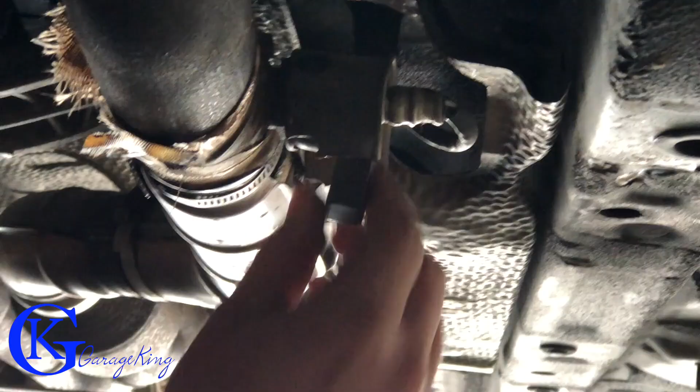This is an OBD2 scanner. It reads 4 systems: ECM, ABS, SRS, and TCM. So pretty much your whole powertrain along with your supplemental restraint system, also known as the airbag. It also has 9 service functions.

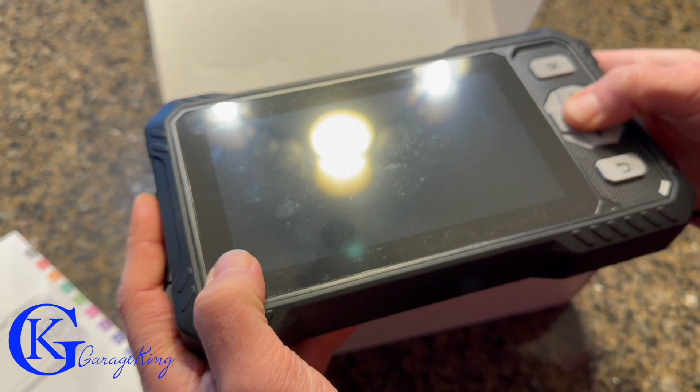When I was taking it out of the box, I noticed it seems like very good quality. The buttons are really good, and it's pretty simple, which is what I like. There's a nice power button, and if we flip it to check out the front buttons, they have a nice tactile feel and seem well built. The only other things in the box, aside from the manual, are your OBD2 cord, which you obviously need, and a cord to charge the instrument. Pretty simple, nothing to it.

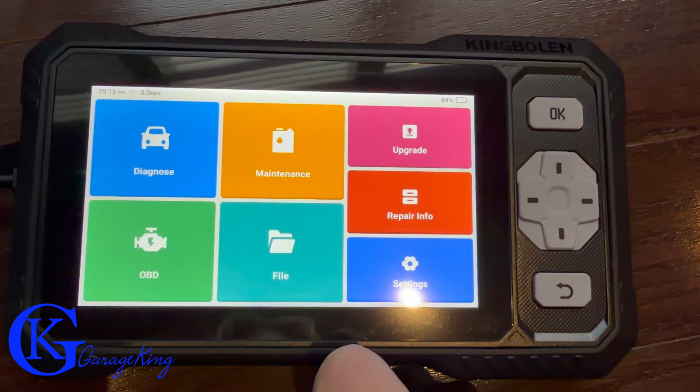Anyway, let's power it up right now. I've sped up the video just a little bit to power it up, and the one thing I wanted to mention was how easy it was to actually set it up. Here's the welcome screen. Once you click the welcome screen, you can see the machine is already good to go - you can plug it into a car. You don't even need the internet.

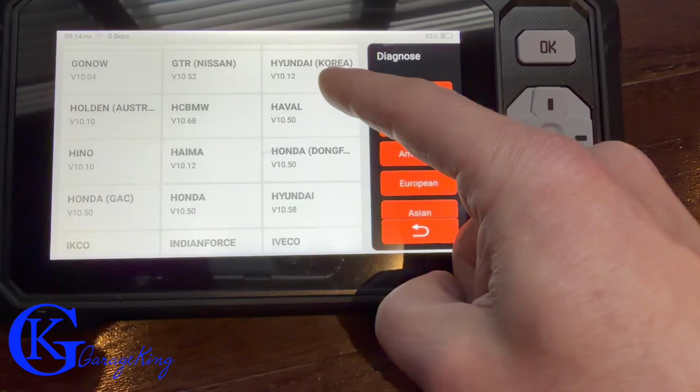The S608 claims to scan up to 100 vehicles, and no doubt it probably does, as I'm scrolling through them right here. You can pause the video if you want. I haven't counted all the boxes, but I'd say there's probably around 100 here. One of the nice things is I didn't have to enter an email or even connect it to the internet for it to start working. However, if you want the latest updates, you'll have to connect it to the internet and use the auto update.

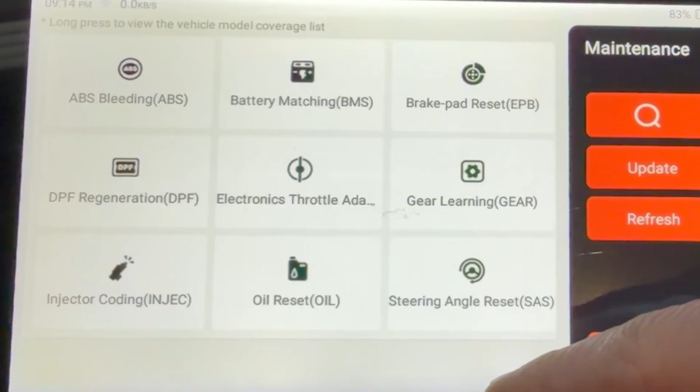Here we're in the maintenance functions, and we can see we have ABS, battery matching, brake pad, DPF regen, electronic throttle, gear learning, injector coding, oil reset, and steering angle reset.

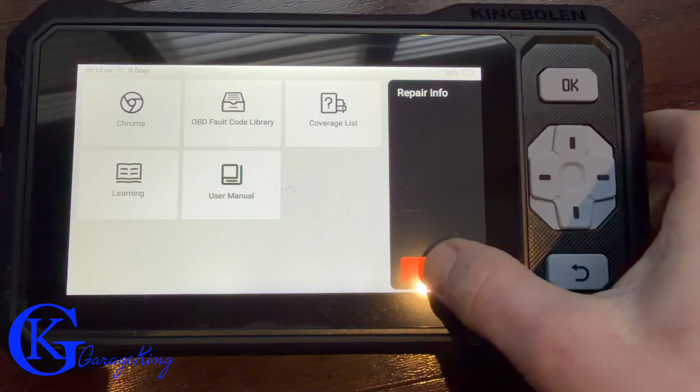Under the repair info tab, you can see we have our browser and our library - a couple things under there. If we look over here, there's our OBD2 or OBD. It's not going to work because we're not plugged into the car. We can go into files over here, and I have no file saved.

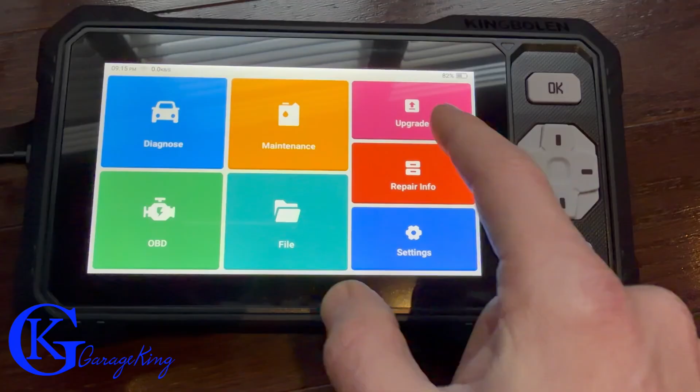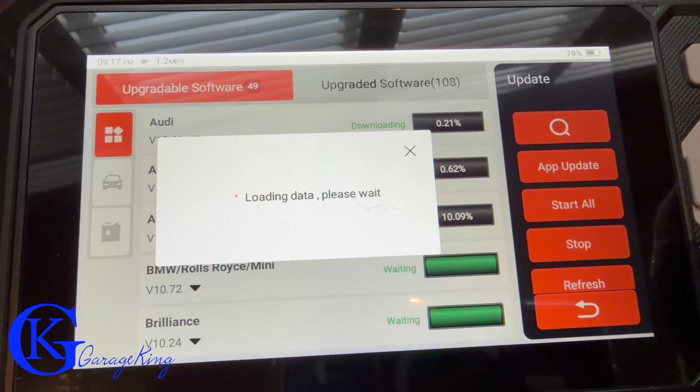Up here we can see this is our upgrade section, and I don't know if you can see in the top part of the screen, but it says 49 are upgradable. So may as well connect to Wi-Fi and upgrade them - it's free, why not? This way we have the latest software. Let's do that, and now let's try it in a vehicle.

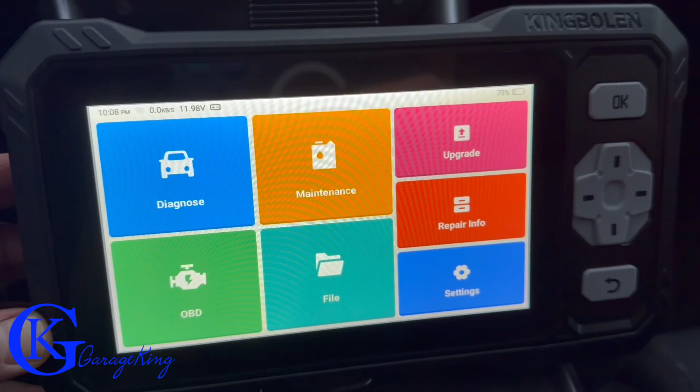So we have my Lexus - absolutely love this vehicle right here. We're going to power it right up and see what this scanner can do. Keep in mind, when we're running the scanner through the paces, that we're at the $200 mark. $200 doesn't really buy you a lot. Let's see exactly what it can do.

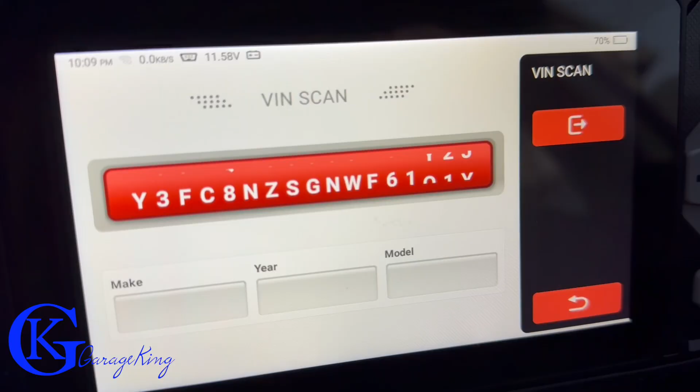I found the auto VIN scan to work very well. The other thing I found with this scanner, which I see in a lot of other scanners, is there's more than one way to get into a system. The first way is through the health report - take a look at the clock at the bottom, you can see it's done in about 10 seconds. That's very fast for a scanner in this price range, and there's all the systems it detected, and we can get into any of them.

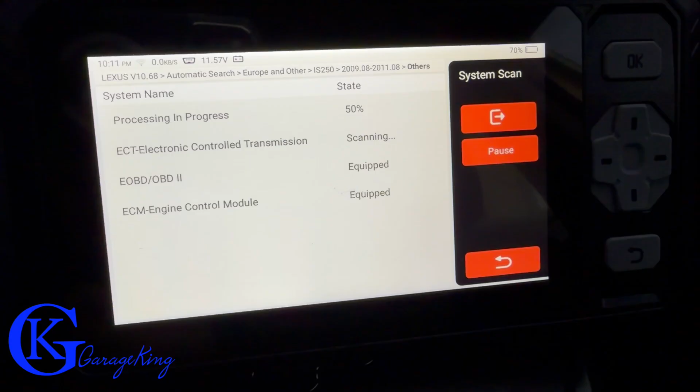The second way you can get in is under the system scan, right under the health report. It'll find all your computers, and then you can just click on whatever computer module you want. For example, I'm in the ECM, the engine control module, and it says there's no trouble codes. Here I can click back and look at our actuator tests down at the bottom.

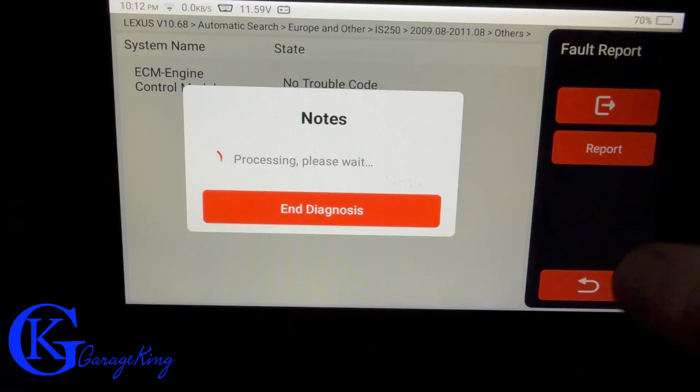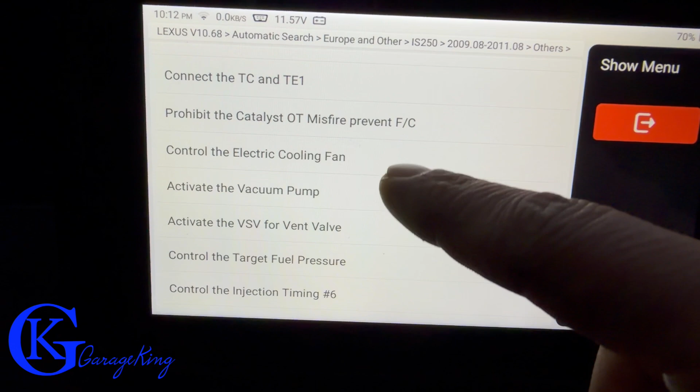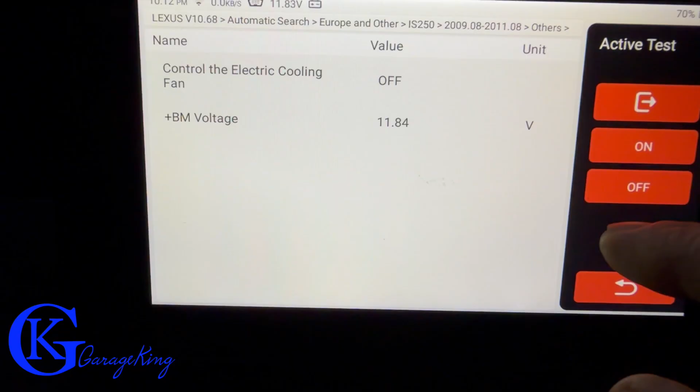I was pleasantly surprised at how many actuator tests there were with the S608. I'm scrolling through them right here, and you can see we have quite the selection. One of the things you can do is monitor data when you're doing the test - this is important if you can't hear certain things. For example, let's monitor the battery voltage when we test the cooling fan, and the battery voltage should go down slightly.

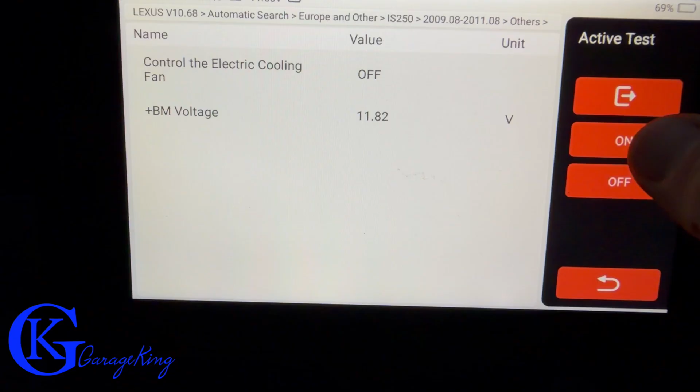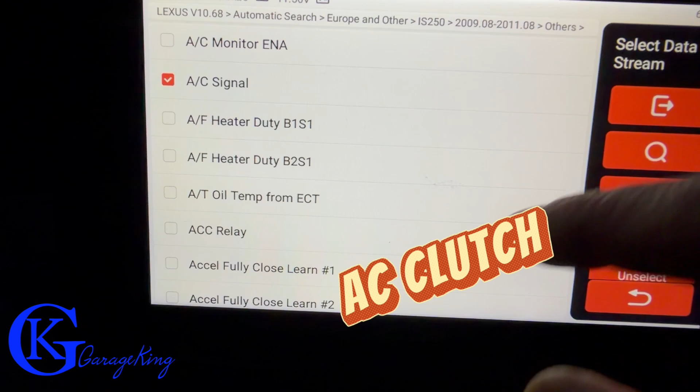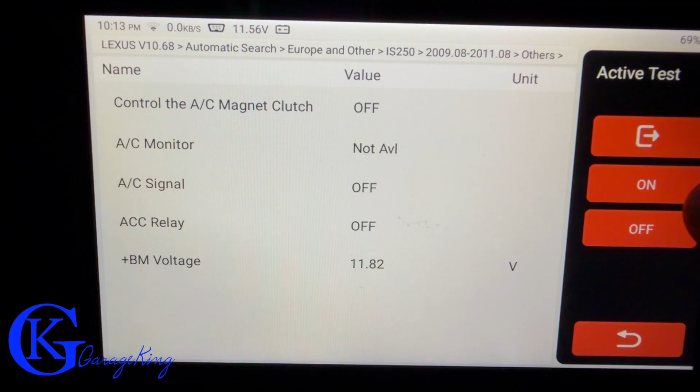Watch the battery voltage again when I turn the fan on. That's also a great way to see any current draw. For example, the AC clutch—I wasn't able to hear it in the vehicle because it's so quiet, but if I look at the battery voltage when I do my actuation test, I can tell it's working because it's drawing a very small voltage. I found that very handy and wanted to share that tip.

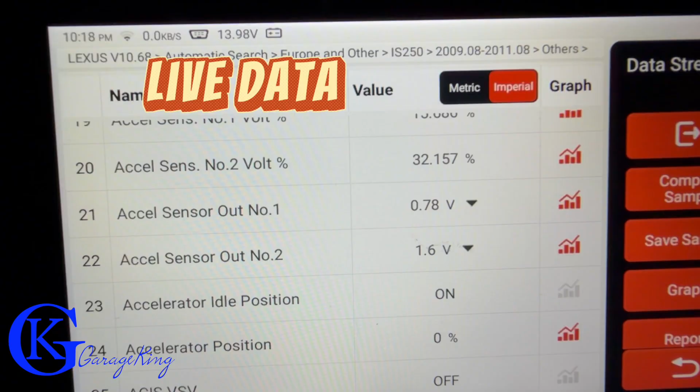Now the starter relay, obviously you're going to know when this one works. Let's check out some live data and see how fast the scanner responds, because you don't want a scanner that's always lagging—it just makes it harder to diagnose things.

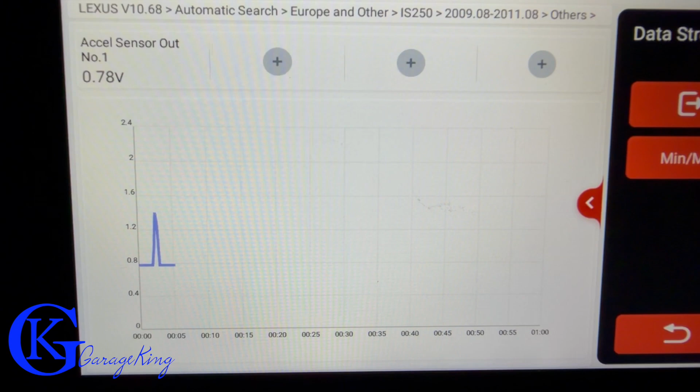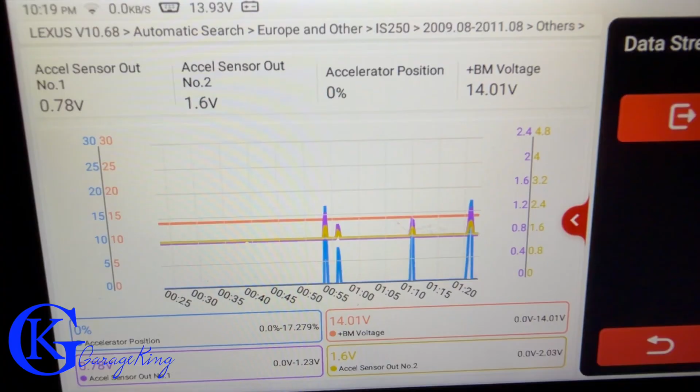The other thing is, looking at the graphing here, I really like that it's accurate. It was very quick, and I was able to graph up to 4 data streams at the same time, with the option to overlay them on one graph. As you can see, I'm overlaying 4 data streams on one graph, and this could come in handy later, say for checking your wheel speed sensors.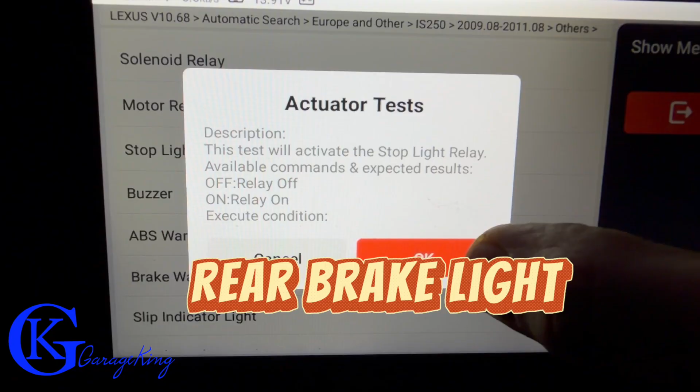The other thing that was pretty cool was the stoplight relay. If you want to activate your rear brake lights, you can see here I don't need monitoring data—I'm just going to activate them on and off. As I push the button, take a look. And there you go, you can see I turned them on. This could be very handy for diagnosing burnt out bulbs when you don't have anyone to step on the brake for you. Now we're into the transmission.

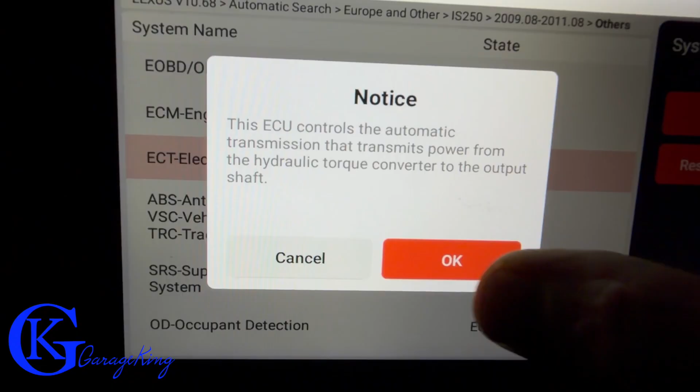Let's see what type of actuator test we have in the transmission. It's looking like in this section we can just activate a bunch of solenoids, so we're not going to get into that right now.

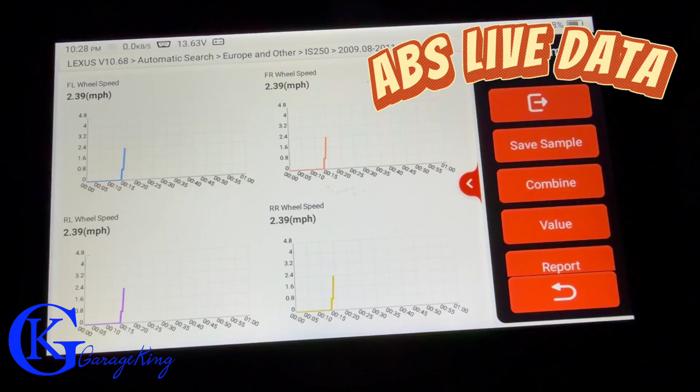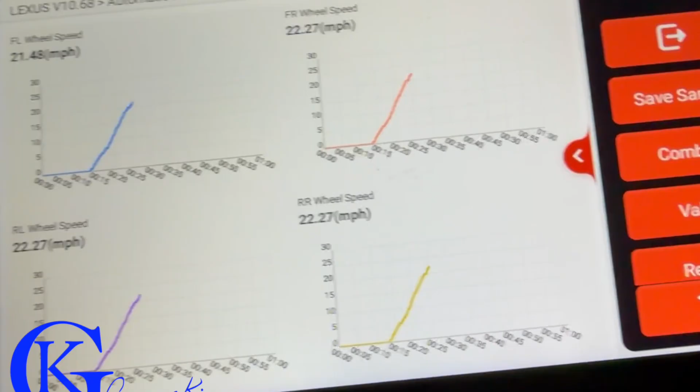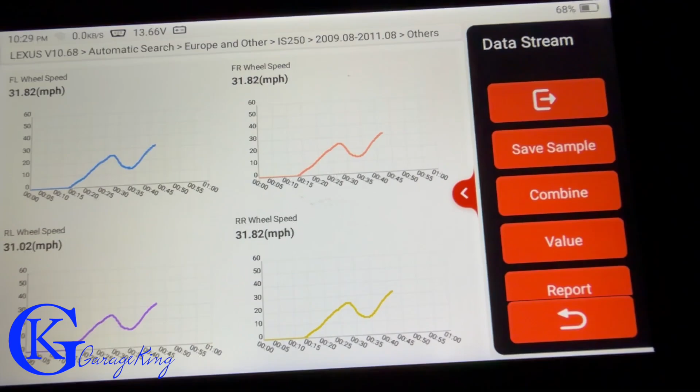Let's head back to the ABS because I did talk about testing the wheel speed sensors. Here I had to get someone to hold the scanner while I'm driving, and there's all 4 wheels—this is very, very handy if you have an ABS light coming on, because I know all 4 sensors are reading exactly the same. Here I'm slowing down, and the graphing is super handy because it'll show if one of the sensors drops out when you're turning, so you can diagnose intermittent problems that way.

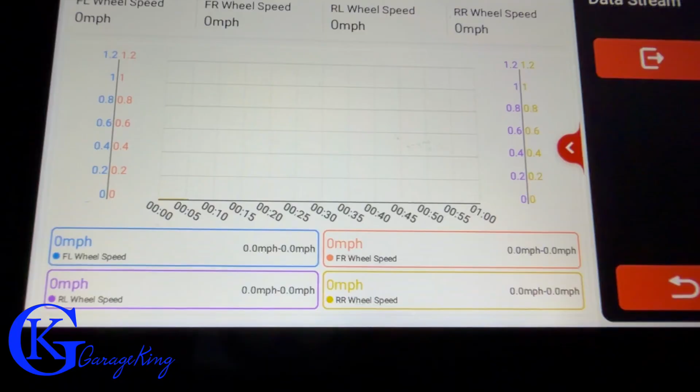Super handy. The other thing we can do is combine them, which makes it easy to see if one is not following the other. Now keep in mind, if you do combine them, they'll only be on the same line if you're driving in a straight line, because as soon as you make a turn, one wheel is going to go slightly faster than the other. So just keep that in mind.

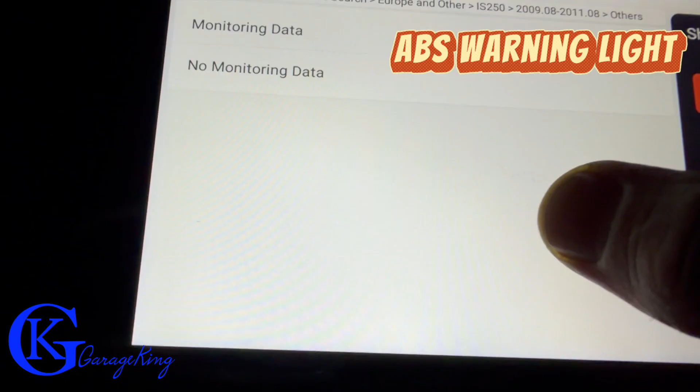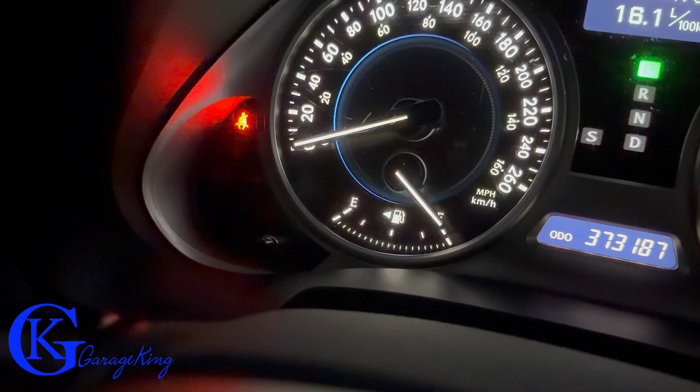Now I wanted to see if it would check the lights on the dash just to make sure they're working. Here's my ABS warning light—you can see there's nothing there, and now I've turned it on, and back off and on. I'm not going to go through all the lights, but let's go through one more. There's my traction control or anti-slip light, and I'm able to turn it on and off with the scanner.

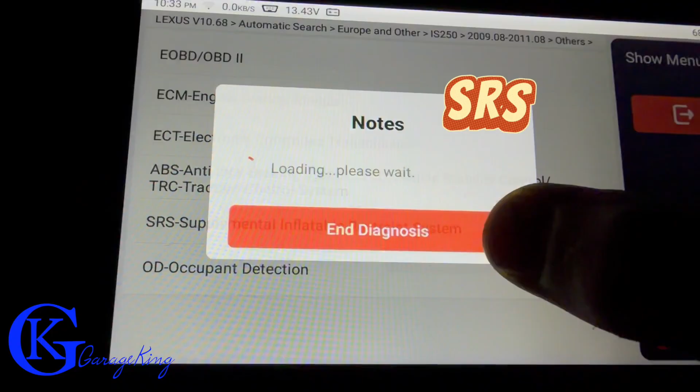Now I went into the SRS, the airbag system, and I wanted to see what I could do with it. With the airbag, it's just read codes, clear codes, and then live data. So I wanted to check what I could do with the live data.

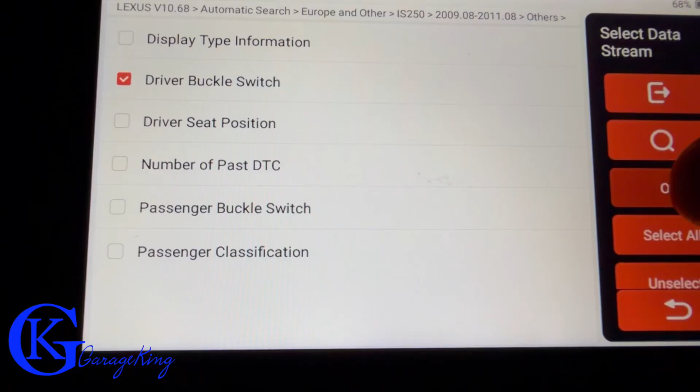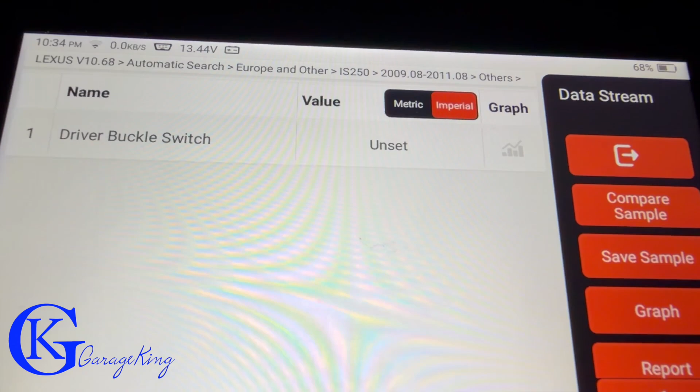Here's the list—let's check the driver buckle switch. It says it's unset. Now all I'm doing is plugging it in and unplugging it, plugging it in and unplugging it, and you can see when it's set and unset, so I know my driver buckle switch is reading correctly.

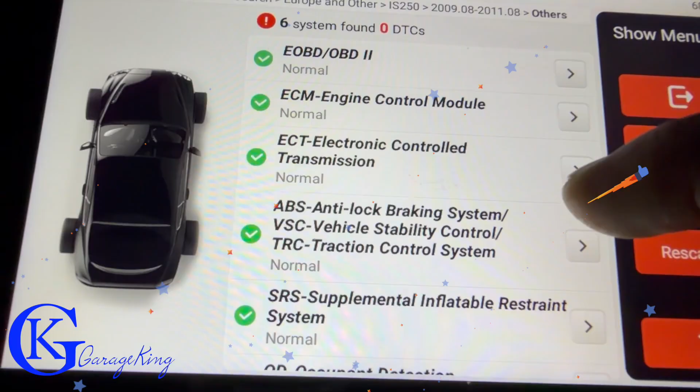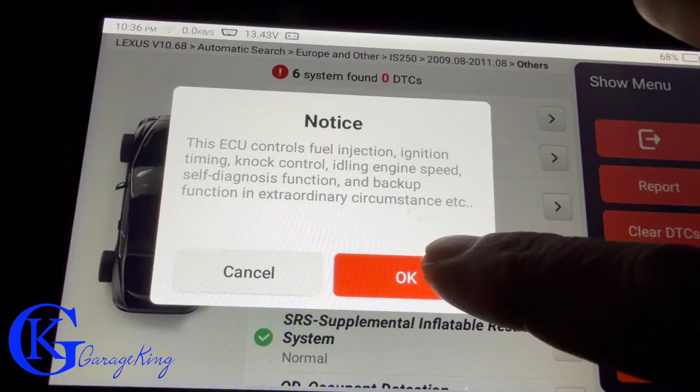Well, if you're wondering what my take on this scanner is, I give it 2 thumbs up—I recommend it, I really do. I was impressed with the build quality and the speed, and it does a lot for $200. I was really impressed with that. I'm very happy they didn't do Bluetooth in this price range, because I think if they did, the scanner would have been a lot slower and just not very good. So I was very, very impressed with it, and for the price, I think it's going to be very hard to beat.